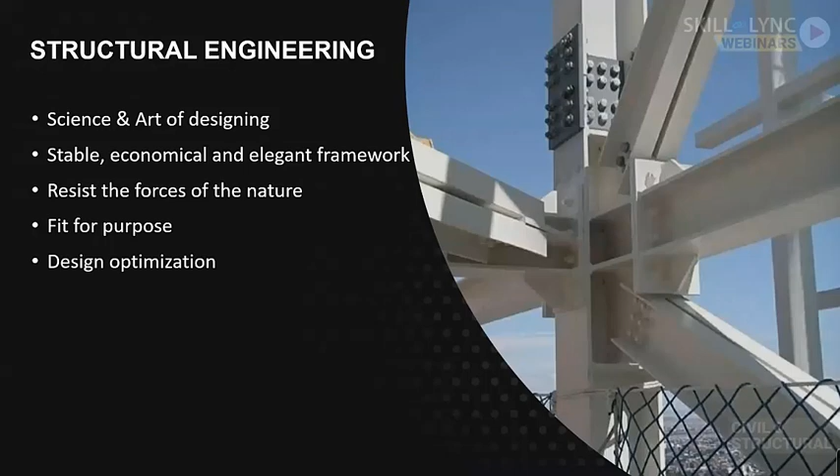So these are the forces which need to be resisted by that framework. And not only that, it should be fit for purpose - just making it is not good enough, it should be fit for its use. It should be an optimized structure, not a very conservative one which would not be helpful to anybody. And it's not just a solution in terms of drawings - the next step is to execute that, to transform those drawings into reality. That's also a challenge for structural engineers.

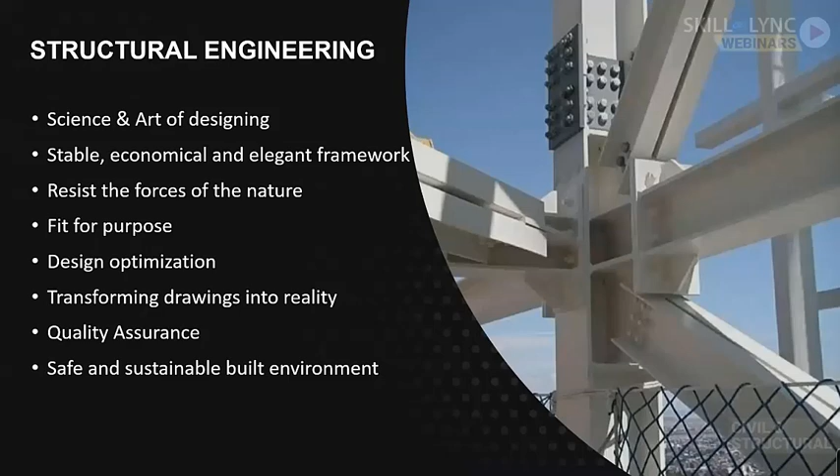Better quality, and thereby an overall safe and sustainable built environment - by all this, we ensure that our habitat is quite safe and sustainable, and that's the key priority or key challenge for a structural engineer.

So you may ask, where lies the scope of a structural engineer? To give you a quick brief and let you know where all we can act, let me share a few examples which I have worked on myself.

So the first area or segment you may say is skyscrapers. You've already seen a few examples of skyscrapers across the world - Burj Khalifa, which you already know is an 828-meter tall building.

Again, Park Avenue from the US, the most slender building in the world. And Taipei 101, again a building located at one of the most challenging locations on earth, considering it faces a lot of earthquakes, cyclones, and typhoons. So all these three buildings are good examples of where a structural engineer can showcase his skills.

Moving on to the next segment is the commercial segment, where we have some luxurious projects: the Claridge in India, the Taj Hotel, Burj Al Arab, a 7-star hotel. All this has been designed by a structural engineer. It definitely requires a good skill of structural engineering in designing such luxurious buildings. This is also one of our aspects.

The next one will be the bridges, a key aspect which you see every day, the long span bridges. We have Howrah Bridge in India, the Golden Gate Bridge, and the Akashi Kaikyo in Japan. The Akashi Kaikyo I would like to highlight is the longest suspension bridge. The span between these two piers would be near about 2 kilometers, without any supporting column. You can assume how huge this is. These are all projects where structural engineers can showcase their talent.

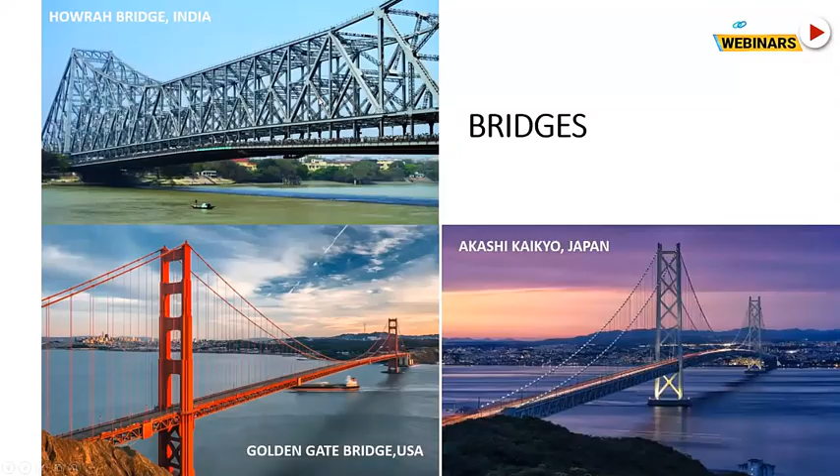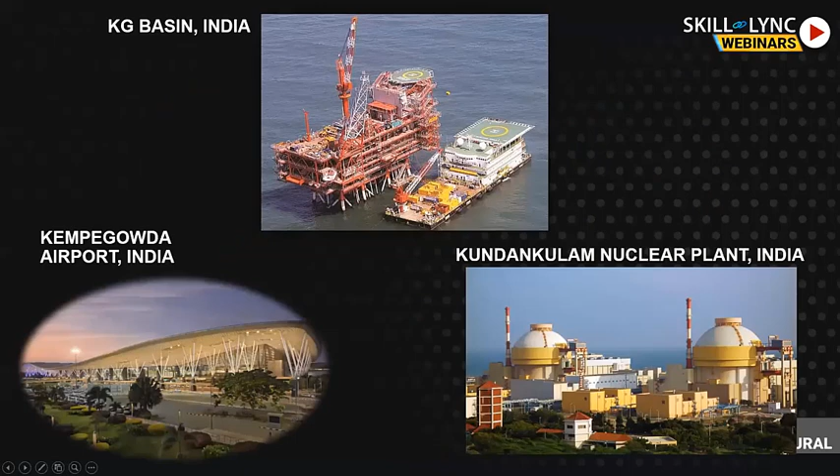The next is the power sector, the aviation sector, the marine sector. Just to give a quick highlight, KG Basin, which is there in India, operated by Reliance, is again designed by a structural engineer, wherein you can already assume there will be a lot of challenging work considering wind and water dynamics involved. So there will be fluid dynamics involved in it. Next is Bengaluru Airport, again a challenging structure in itself. Also the nuclear power plants - we also design nuclear power plants.

So all in all, these are all the brief sectors wherein we can be involved, and there are quite a vast range of sectors basically. If I can brief out what are the key specialities within the structural engineering domain, they can be bridge design, tunnel design, hydraulic design, marine engineering, wind engineering, earthquake engineering, and blast resistant design.

Now you may ask that we don't have any such special course on blast design, or maybe hydraulic engineering, or tunnel design, but these sectors can only be worked on once you have good exposure into the field. Once you get a job, you work in this area, and then you can develop the expertise within these domains. So these are the key domains where the expertise lies in. It's not only getting into structural engineering - it has in it many domains where we can specialize our skills into.

So you may ask, who are the prominent personalities? We never heard of a structural engineer in our day-to-day life. So I would just highlight a few of them. Gustav Eiffel - I hope you would have heard his name. He's the structural engineer behind the Eiffel Tower.

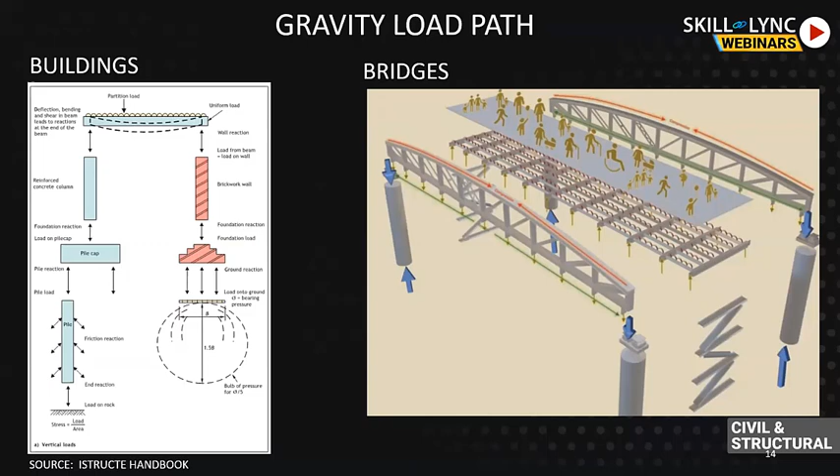Now the first force is this gravity force. You may say this is quite simple, right? So is this the only force we are restricting to? We do have to consider more. I'll just show you one more example for the bridges as well.

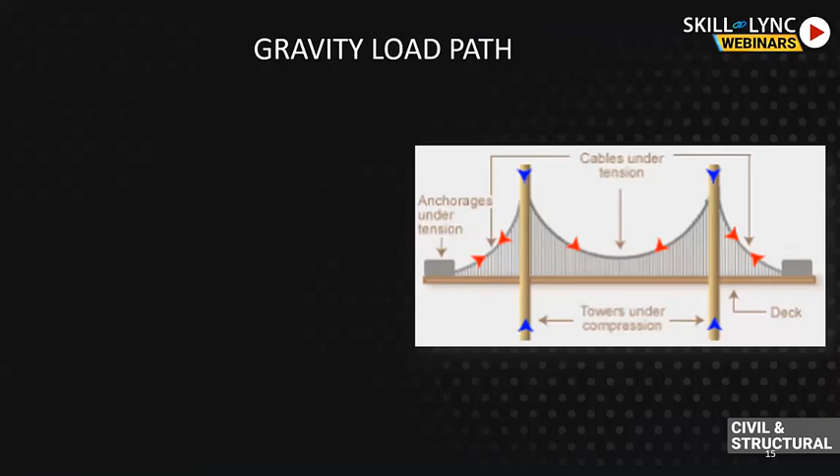These are for suspension bridges, and this is for cable-stayed bridges. The load transfer is slightly different in both bridge types. In the suspension bridge, deck load is supported on tie cables, and these tie cables go back to the pylons, the vertical elements you can see over here. These vertical elements then transfer the load back to the foundation, and this is how the load transfer takes place.

While in the cable-stayed bridge, the load is directly getting transferred from the deck to the pylon, rather than in the suspension bridge, where it goes from the deck to the tie cables and then to the main suspension cable. So this is the difference between these two bridge systems. Depending on the spans we have, we select a suitable bridge type.

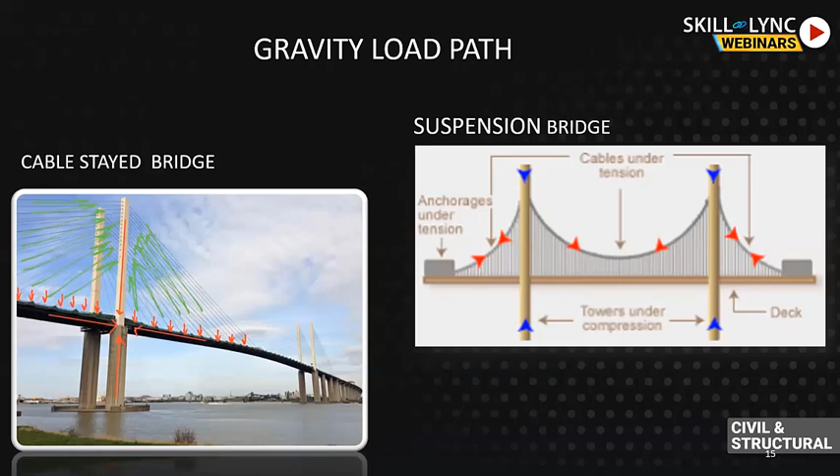Coming to the fact that gravity is not the only load, we do have lateral loads involved, lateral in terms of wind and seismic. Now you may ask that both are lateral loads, so would they act in similar manner? No, definitely not. The occurrence of wind and the application of wind load is quite different to what seismic load is. Seismic is through an earthquake, when an earthquake triggers below your house or something.

To brief you regarding wind loads, they directly depend on the wind speed, the terrain, and the geometry of the structure. As we go tall, the wind force keeps on increasing. So you may see that when your structure goes to about 1 kilometer or 900 meters, you have significant wind load to resist. Now the same phenomenon doesn't occur with the seismic load.

It doesn't mean that if you build tall, the seismic force keeps on increasing. The seismic force is a different force, due to virtue of its own inertia or its own weight. You may say like when somebody pushes you, you displace yourself, right? Similarly, when somebody pushes the building, and in our case that's an earthquake, there is some force due to the inertia. That's why the force is quite different in seismic compared to wind.

In seismic, it is more dependent on the mass of the structure, not the orientation or the height of the structure, but rather the mass of the structure is critical. And both these lateral loads need a different way of structural framing and how we can resist them.

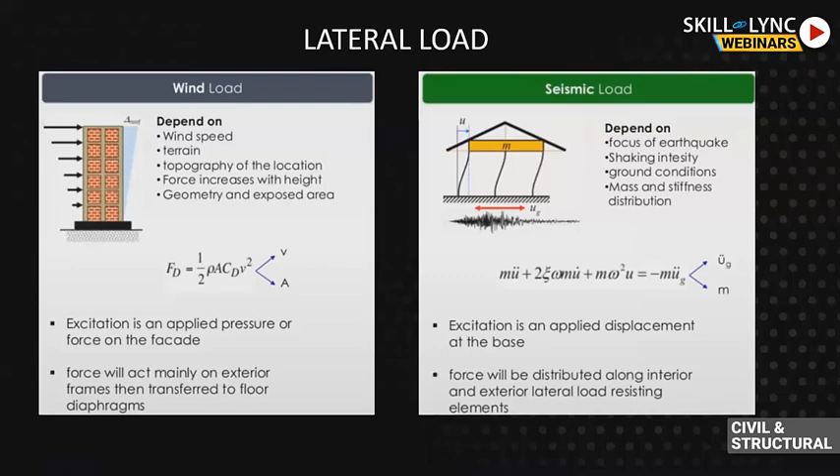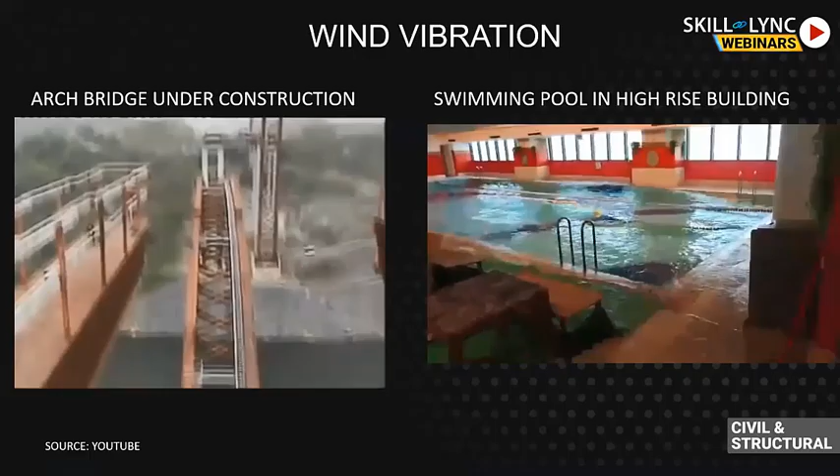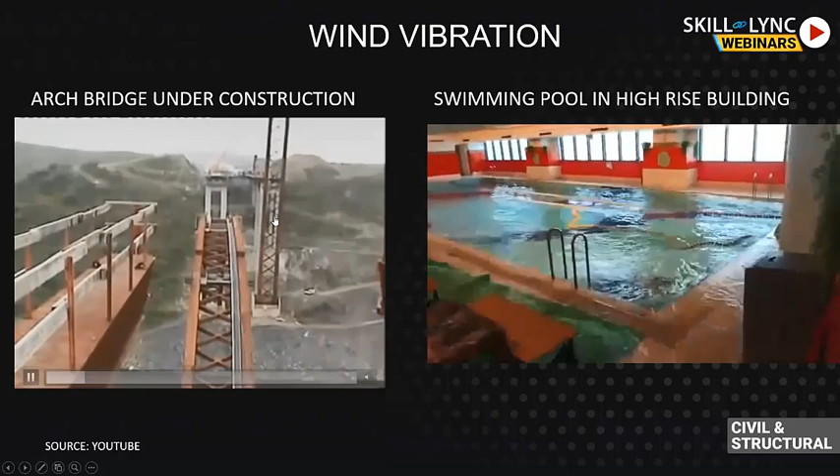I'll show you a few slides and videos of excitations due to wind. This is a swimming pool on a high rise building. You can see how large the vibrations could be if you're at 800 or 900 meters. So it's not possible to go so tall considering the wind keeps increasing, and these designs aren't fit for purpose. The structure doesn't fulfill its purpose if you build a swimming pool at the top of such a tall building. Or look at this arch bridge, which is resonating slightly with the wind frequency. These are a few examples of wind vibration.

One more challenge we face while designing for wind is the vortex shedding phenomenon. Usually we think if the wind is coming from the west, the structure would displace from west to east, but that doesn't happen under certain circumstances. When wind flows from west to east, the structure tends to vibrate perpendicular to the wind direction. This is what vortex shedding is about.

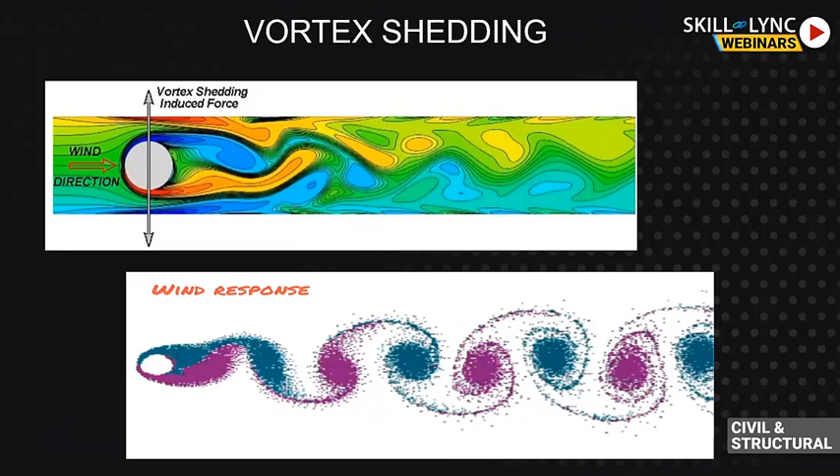In this video, you can see vortices formed just after the wind passes the structure, which is circular in shape. Once the wind passes through it, vortexes are formed. These vortexes are the reason for the displacement or vibration in the direction perpendicular to the wind. So wind is not a simple force—it involves a lot of complexity and many challenges.

Coming back to the seismic part, seismic force is dependent on mass—it's again a challenging force. I'll show you a quick video in the next slide where you can see how that is resisted.

For seismic design, our philosophy is strong column, weak beam—we make columns stronger and beams weaker. So when an earthquake comes, there would be slight or minor damage in the beams, not a structural collapse. There might be slight deformation or rotations in the beams causing some cracking, but that doesn't mean the structure will collapse. Our fundamental philosophy in seismic design is that the structure should not collapse—it should remain stable until everyone can vacate. The structure may get some damage, that's fine, but it should not collapse.

But if you allow your columns to be very thin, as shown in the image on the right, where columns are thin and beams are strong, the damage will occur at the column. If one column gets compromised, the system becomes unstable and tends to collapse. So the philosophy of seismic or earthquake design is strong column, weak beam—there might be damage in local elements, but globally the structure will remain stable.

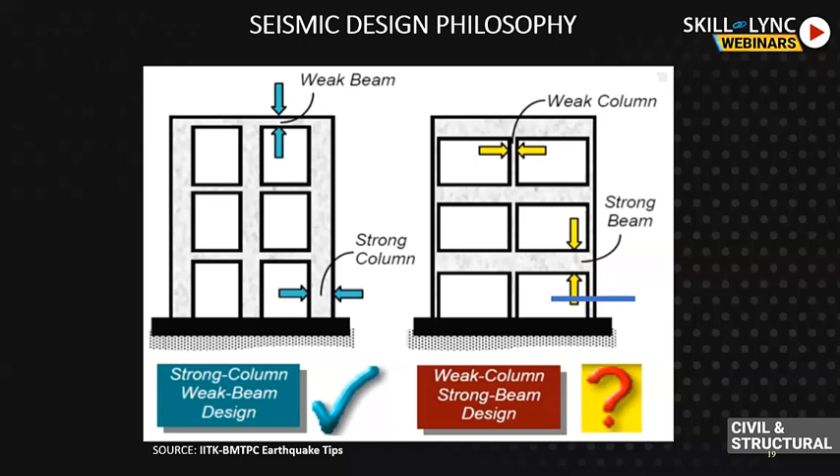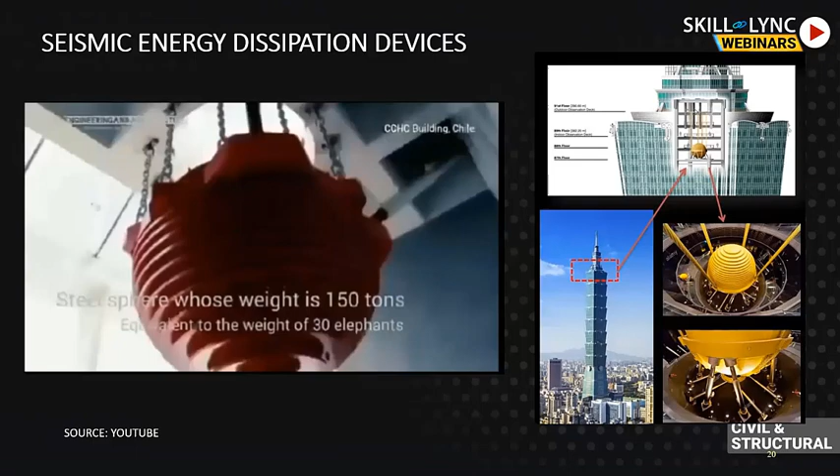This is just a quick video. I mentioned how you might need to build in a high earthquake zone, so they use seismic energy dissipation devices. Basically, whatever force the building gets due to its own weight, they try to release that energy in another way. Here you can see a tuned mass damper at the top of the building—a huge tuned mass ball damper.

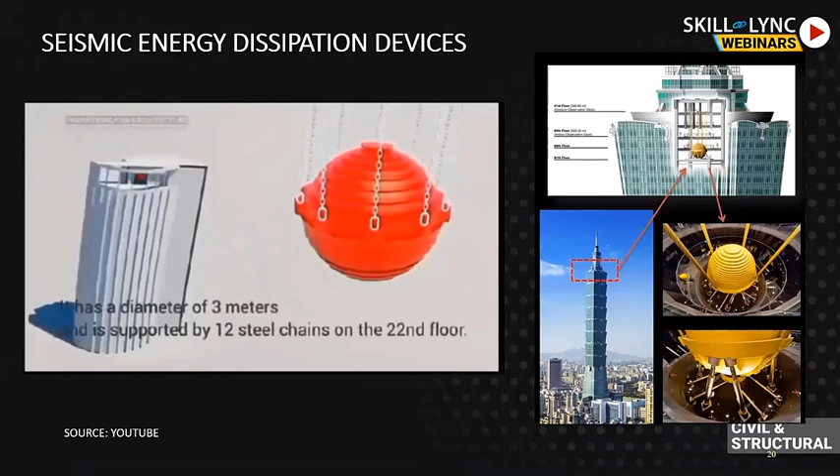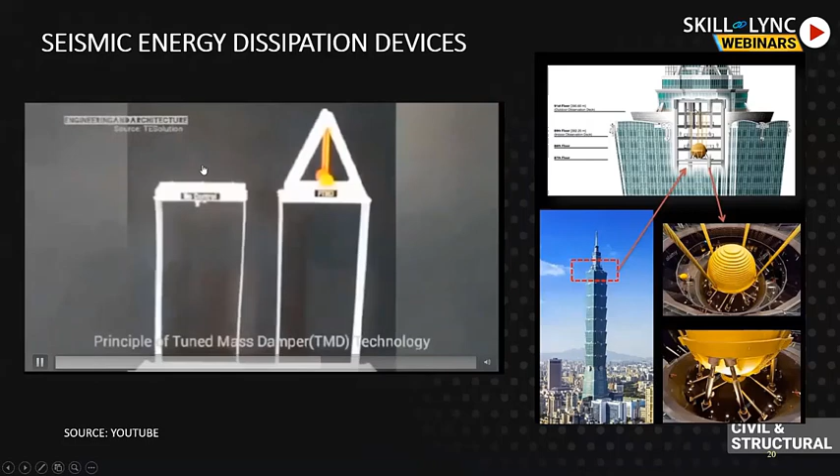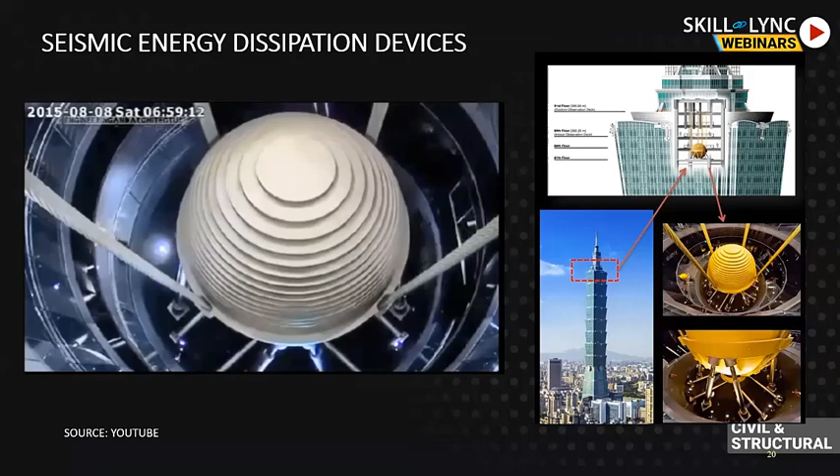When the structure tries to move left, the damper goes right, keeping the overall structure's vibrations stable. You can see the structure without the damper is still moving, but with the damper it has come to a standstill. This is a live video of Taipei 101 during a seismic event—the damper moves opposite to the building's movement, compensating for it. This is a good example of how we dissipate energy when the challenges of earthquakes are huge.

The next level is we don't allow damage at all for critical structures, like hospitals or power plants. We don't allow damages to occur because those are critical structures. If your structure is a dam and you allow cracking or damage, the dam may fail, and that would cause another big event.

So in these types of structures, there is a performance level determined, and we design according to those performance levels. We design such that the dam may not have major cracks, only cracks up to the limit where it doesn't lead to structural failure.

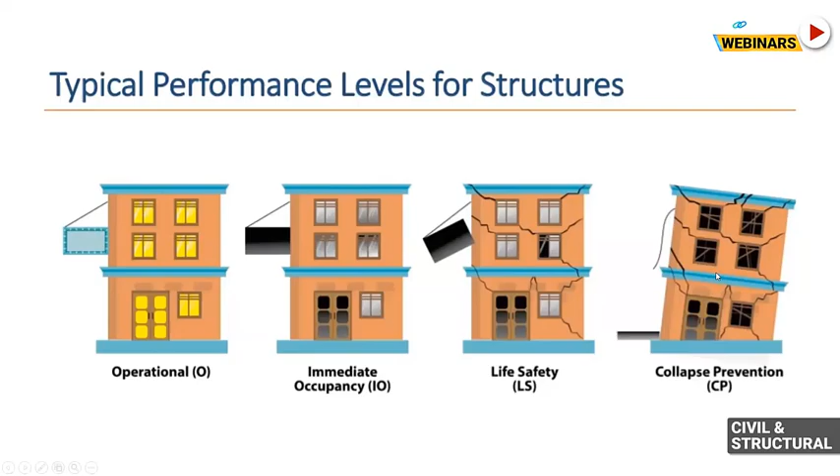So these are the four different levels in earthquake engineering for which we design our structures. Now, to give you a quick brief of the latest trends, this includes computational design, wherein you can create challenging structures. You may have already seen a few of those structures coming around, all done with the help of computational design software.

These are really required when addressing complex structures. Learning this computational design approach improves productivity, makes your structures more efficient and optimized, and now you can build a structure of any shape. Manually it's quite difficult to calculate forces for these complex structures, but using the computational power of computers we can definitely design them.

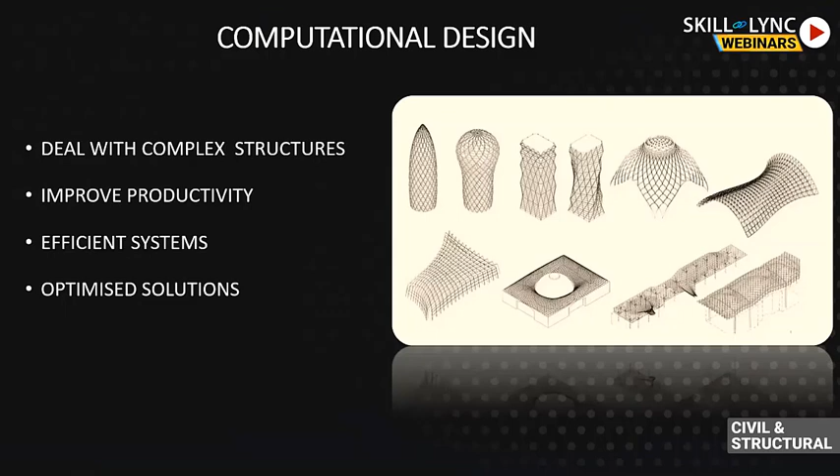So that's what's coming up in the field of structural engineering - we have a lot more computational power, and we are taking the benefit of that for designing more complex structures.

For your understanding of career progression within structural engineering: you may join as a graduate engineer in a firm and move up the ladder to becoming a senior structural engineer. This transition usually takes around 4 to 5 years from graduate to senior engineer, then again 3 or 4 years to principal engineer or project manager, where you'd be handling a project in structural design.

You would be responsible for management on site as well, as the project goes through the execution phase. Next comes associate engineer or senior project manager, where the role is more advisory, and you become a key person for that ongoing project.

You need to coordinate with all the different disciplines involved in that project. Once you complete a few projects as a principal, you move up to associate engineer, and then become a technical director or project director, moving into business development aspects - bidding for work, approaching clients, convincing them, and delivering the project as a whole.

So these are the key progression steps within a structural engineer's journey. And again, the sky's the limit - you can also reach director level, or open your own consultancy firm. These are all the opportunities available in this field.